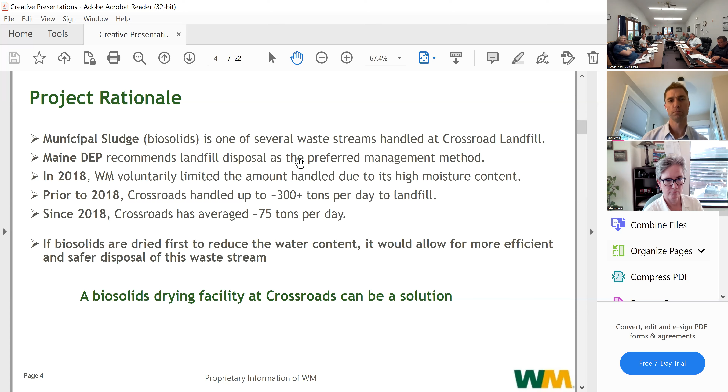Through some research and the need in the state to find some disposal solutions for sludge, we started looking at different ways we could handle some of this. And the obvious way was to dry it. If we could dry the material, we could safely handle it more efficiently in our landfill. So we conceived this idea of the project, a drying facility at Crossroads, as a solution to help local wastewater plants. Next slide here. Going backwards.

Okay, so the proposed facility is a very simple approach. All we're trying to do is dry the material for more efficient disposal in our secure landfill. Overview of what we're proposing: the facility is designed to handle 200, as they call it, wet tons, as-is tons over the scale, inbound and dry that material to reduce the water content from 75% down to less than 30%. And once you go through that process, that 200 tons would turn into 50 tons of dry material.

So it would go from that jello-like material to a dry material like you see in the picture. This would make it much easier for us to landfill the material. We propose to use state-of-the-art technology that's very energy efficient, which we're pretty excited about. We'll tell you about it in a moment. All of the storage and processing of the materials would be in an enclosed building with engineered odor control. And that 150 tons of water that comes out would be piped to a tank, and we would treat that material for PFAS if necessary before transporting it offsite to wastewater plants, those same plants that we brought the sludge from. So a pretty simple concept.

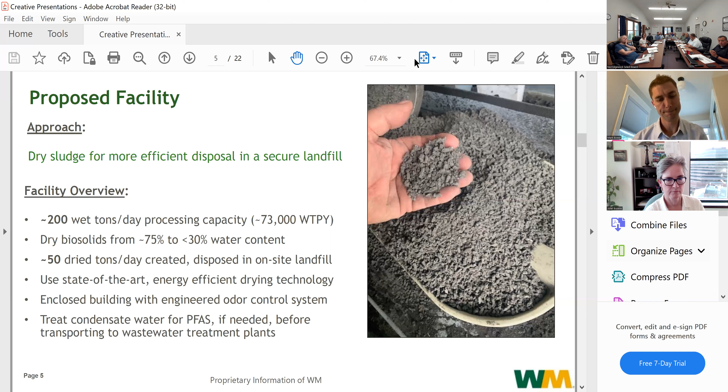We assembled a project team for this. Obviously, we're the owner and we'll be the operator. Woodard & Curran is providing our primary engineering support and helping us with permitting. Odor Science and Engineering, an expert in odor science and engineering, is providing some engineering support. Sewall Company from Portland has done a traffic impact review. Verrill, formerly Verrill Dana, is providing permitting support.

Sheridan Construction out of Fairfield would be our general contractor, and IEC Electrical out of Strong, Maine would be our electrical contractor. You'll understand in a moment why I bring them into the picture, why the electrician is on the slide. And then Shincci USA would provide the drying equipment.

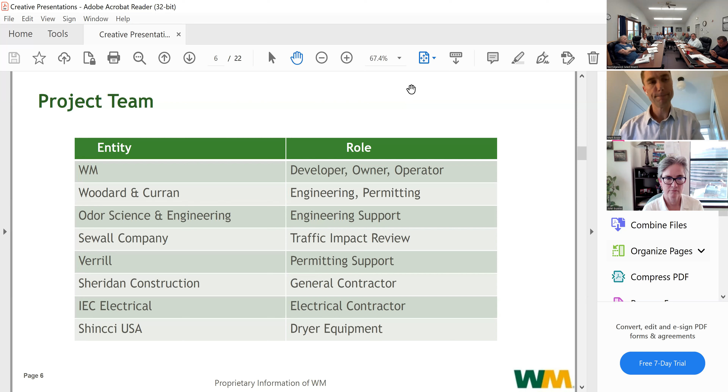The permits required: obviously, we need a site plan permit from the town here, and we recognize we need a sanitary wastewater disposal permit for that holding tank for sanitary waste from the washrooms. We also need some permits from the Maine DEP. We will need a Chapter 409 solid waste processing facility license. And we will also need air emissions licenses from chapters 140 and 115. I'll point out that odor is regulated under Chapter 409. Maine has some very strict odor regulations related to these kind of processing facilities, and that would be covered there.

The Chapter 140 and 115 will do a review to see if there's any other aspects from this proposed facility that may affect the landfill's current air emissions license. And we're also going to have a small generator just for safety reasons to have lights on and safety equipment in the event that we have an outage.

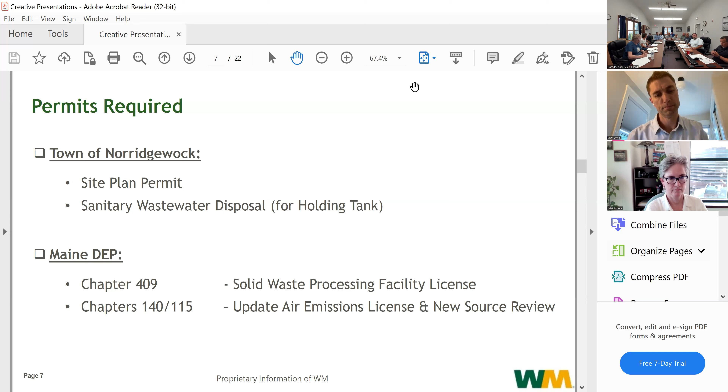So you don't have either of these permits yet? Oh, no, a great point. We wanted to first start the town permit. We plan to apply for the state permits in late August. We had a pre-application meeting with the DEP a few weeks ago, but those permit applications are not submitted yet. Okay.

So, technology overview. A little bit about sludge drying. Sludge drying has been around for many decades in the US. There are many successful operating sludge dryers since the 1980s, still operating today in the US and actually around the world. The technology has evolved, and we've kept up with the evolutions of that.

And a particular technology in this situation seemed most applicable, and that is the Shincci low temperature belt type dryer. I'll show you a little diagram of it in a moment, show you how it works. This is starting to catch on quite a bit in the US. There are hundreds of installations worldwide doing much more tonnage than we propose. But installations in the US, there's already one in Arizona, Vermont, Wisconsin, and there are more planned of this kind of

dryer. The reason why it's catching on is it's extremely energy efficient. It's an electric heat pump design that uses a third of the energy of conventional drying. It operates at a relatively low temperature. Conventional dryers may operate up to 700 degrees Fahrenheit. This operates at about 165 degrees Fahrenheit, not much hotter than your clothes dryer. And the slow speed, that temperature and the slow speed of the belt minimizes any dust or safety concerns related to the dust.

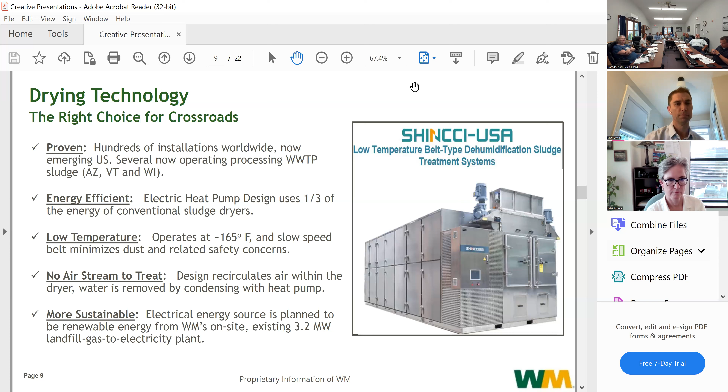How this works, I'm going to use the mouse here. First, I'll talk about how sludge moves through the equipment. There'll be 3 dryers, and we'll show you a layout of the facility in just a moment, but they're each identical. It's a fully enclosed box, if you will, like you see on the right here. Sludge is conveyed from our receiving and storage area into an opening at the top of the dryer. These dryers are approximately 10 feet wide, 100 feet long, about 8 to 9 feet high. And except for the opening coming in, it's fully enclosed.

The material gets spread out on the perforated belt and slowly moves over the course of 3 hours down one way and drops down to the bottom belt and back to the beginning, where it comes out as the dried material. Now the airflow, this is the unique aspect of this. This is also within this box.

The hot side of the heat pump, the compression side, heats up the air, and that air is blown through the belts. The belts are perforated, and that air picks up the moisture. It soaks up the moisture, and that warm, wet air, a little cooler now, goes back to the cool side of the heat pump where it condenses out. The water then comes out. Like a cold drink of ice cubes on a hot, humid day, it drops out and that collects the condensate. So it's a contained circular loop for the airstream.

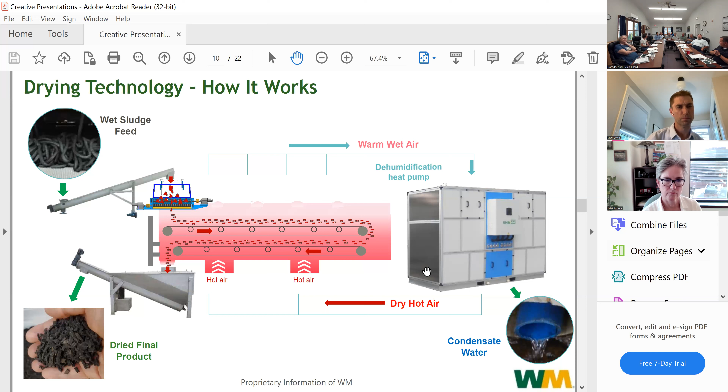So you're going to basically, any air leakage coming out of the entrance and the exit will be recycled inside the building. No, there'll be minimal air coming out of those 2 openings. I could probably best show you in a video, but it will smell in that room. I'm certain of it. It just won't be 10,000 cubic feet per minute of air blasting through there.

So now to jump onto the 30% design, which is the level that's required for permit applications like this, and that is required for the DEP applications that we hope to submit in August. For those of you that aren't oriented to the landfill, aerial shot: Route 2 down here. This is our private road up here. Goes up to the existing landfill. The landfill gas to energy plant is up there.

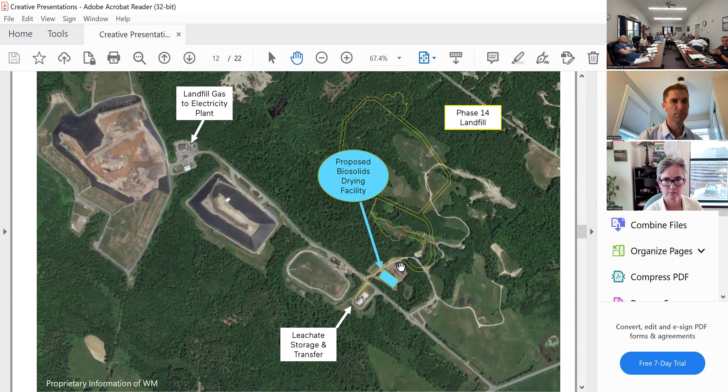Over here outlined in yellow, if you can see it, is the new phase 14 expansion, which will be online shortly. And over here is the existing leachate storage and transfer tanks. We propose putting the new biosolids facility at the site of the former tire processing facility that closed a little over a year ago. So it's deep within our site.

It's well buffered, 2,200 feet from the nearest resident. Significant buffers to all wetlands, and it's not near any wetlands of significance or other sensitive areas. And we will engineer in protections to make sure any sludge receiving activities are undercover and have containment to catch spills to be able to put that material in the building.

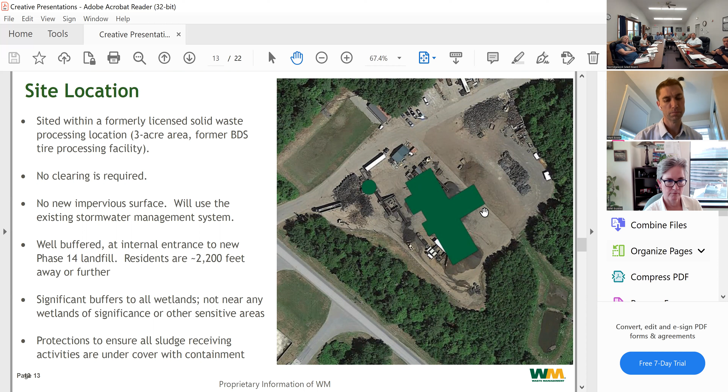This just gives you another view of this, an engineering view of it. You can see how we would build this out. Again, we're not developing any new area that wasn't already developed. The building is approximately 18,000 square feet. And I've got a better view of this in a second, but I wanted to show you trucks will come in. They will pull over here. They will back in. This area that looks a little whiter, that's actually a canopy. And they will back up to doors to empty into the building. They'll empty over a curb. The building floor for the sludge storage building will be about 8 feet below the curb. So the loads will slide off into the building.

Also point out here, this area over here is where the product comes out of the building. This is the processing building right here. I'll give you a better view of this in a moment. But this is where the product comes out. Again, that'd be a canopied building, not fully enclosed, but that dry product will be taken directly to the landfill working face. So it's just kind of taking a stop here for a little while before it goes on its way. I'll also point out here, it's engineered to get good circulation around the building for emergency access, fire trucks, etc. And the blue there is the condensate storage tank.

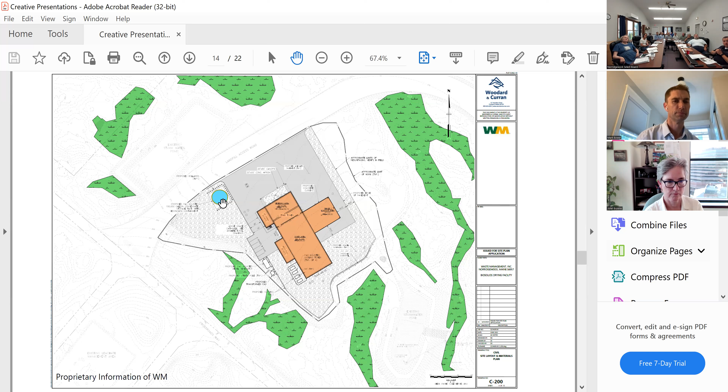Here's a general arrangement showing the building a little closer. I'll call it a floor plan. This shows you the area that trucks would back into up to these doors. Those doors would remain closed, except when we're accepting loads. They back up tires to the curb, tip into the biosolid storage building. This is one big building, but it's two separate areas. Okay, so this is the biosolid storage building. These are hoppers that'll feed the dryers. There's a hopper for each dryer, so it's 3 independent trains.

But this building, our analysis shows, our testing shows, this is where the majority of the odor potential could be from, in that sludge storage building. So that is going to be kept separate from the other building and will be ventilated at the rate of 4 air changes per hour to an odor control system. And we'll talk more about that in a moment.

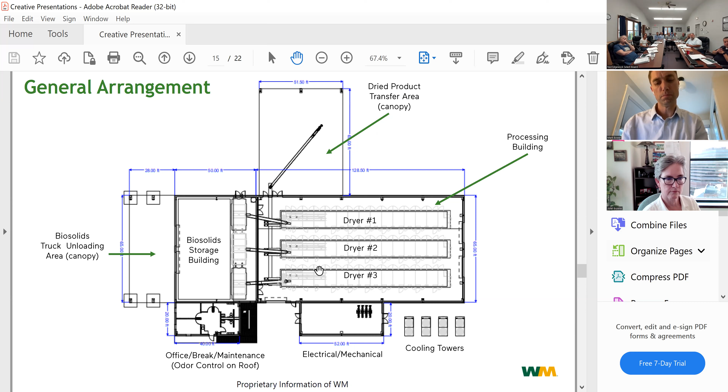Here's the dried product transfer area right over here. We have an electrical mechanical room over in this area, and then there's an office break maintenance area with an odor control system on the roof of that building to service both this area and this area. So to talk a little bit about odor and traffic and noise and some of the protections we put in place.

Odor control, two primary potential sources, biosolids transport in the trucks. And we're expecting 8 to 10 trucks per day, which is far less than we used to take prior to 2018 of the same material. And the trucks are going to be required to follow our transporter rules and requirements and existing license requirements. So these kind of trucks have to have sealed tailgates, have to be covered. They need to follow not just the DOT rules, but also our rules.

For the processing facility, our first line of defense, of course, is it's a well buffered and protected location, but we're certainly not relying on that at all. We're going to follow a contain and treat strategy for the storage and processing buildings. They'll be fully enclosed under negative pressure. So we're always pulling air into the building to go to the active odor control system.

And in designing the odor control system, we determined it was best to get accurate source data from actual sludge storage areas and from a similar drying facility for the processing room, as you were talking about before. And the odor levels are much higher in the sludge storage area than the processing room, was confirmed there. But we wanted that data to do our odor modeling. Woodard & Curran has specialists on their staff that did detailed modeling. It takes into account atmospheric conditions, topography, the roofs, where we put stacks, all kinds of things.

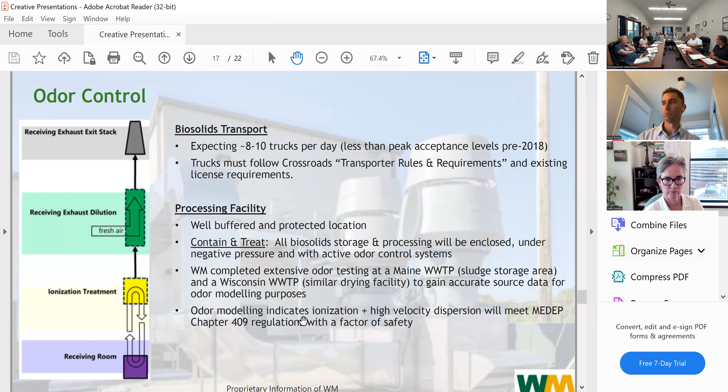Okay. We looked at many different kinds of odor control systems, and in the end, the modeling indicated that technology called ionization plus high velocity dispersion, which is basically high velocity dilution of post ionization, easily meets Maine's Chapter 409 regulations, which are very strict not to have basically odor at a property line. Hope that begins to answer your question. We can probably talk more about that if you'd like. Yeah, I get more questions on that. Okay. Yeah, I think Woodard & Curran can provide some answers there as well.

Traffic. So the proposed facility, again, it's going to be 8 to 10 trucks per day. It'll generate 4 to 6 tanker trucks of condensate going off-site back to wastewater plants for disposal. And there's an estimated 10 trips related to employees and vendor deliveries. So that full traffic impact study was completed last month by Sewall Company. It included all landfill related traffic, not just our proposed new facility, but everything that comes in and out of our road.

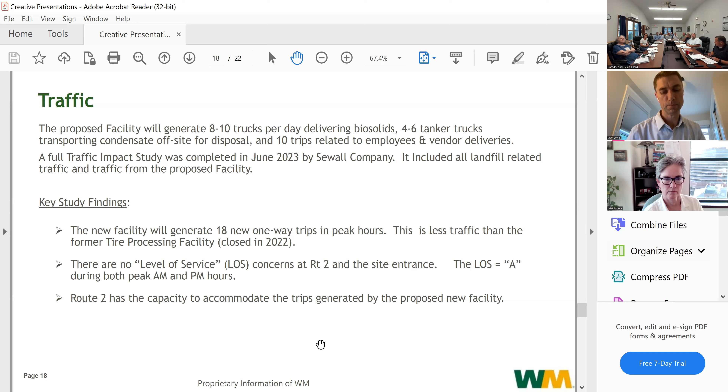And the major findings out of that, it takes up quite a bit of the application that's in front of you, but the major findings were that the facility will generate about 18 new one-way trips during peak hours. But this is less traffic than the former tire processing facility generated. That had significantly more. It also found that there are no level of service concerns at Route 2 and the site entrance. It meets DOT's highest standard, level of service A, during both the peak morning and afternoon hours. And then finally, it found that Route 2 has the capacity to accommodate the trips generated by the proposed new facility. So pretty solid study.

With respect to noise, again, facility location works in our favor, on purpose, to have it more towards the center of the site. There'll be noise from trucks and loading equipment, but it'll be similar to the noise generated by the existing operations of the landfill, and it's limited to normal working hours. Processing equipment in the building, conveyances and drying equipment are fully enclosed in an insulated building. And this equipment does not make a lot of noise.

The largest potential noise source in our analysis was the odor control equipment outside the building, the fans that run 24/7. The analysis on that, using the data provided by the supplier of the equipment, was the noise would be expected to be about 38 decibels at 360 feet from the facility. And why do we put 360 feet? Because, again, these are requirements we have to do for DEP, all this modeling. That's the nearest property line, but that's a property line that's landlocked. So far lower levels, lower than 30 decibels, at the next nearest occupied property lines.

For comparison, 40 decibels is considered the sound of a quiet library. This particular kind of setup that we're using is common not only in wastewater treatment plant settings, but it's also used in urban areas, at labs at universities, academic settings and other situations like that. And one of the reasons is it's pretty quiet. So again, it's expected to be significantly less than the former tire processing facility that was not enclosed.

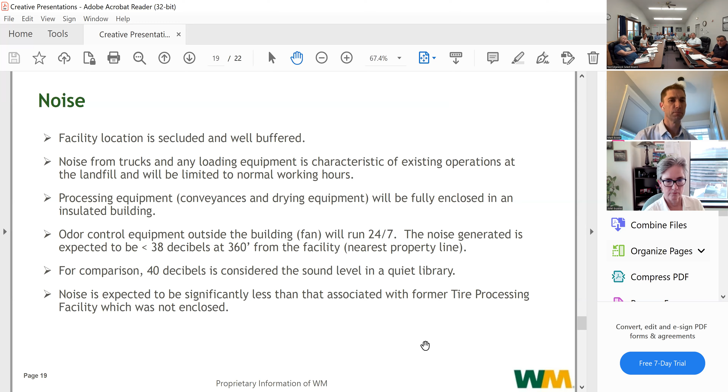And at that, I probably ran just over my 20 minutes, but I got a couple questions.

My biggest concern is the dust particles, because you're going to get dust particles. That's just a given. And these possibly could be PFAS type stuff, where you're using an exhaust fan to create your negative draft inside the building. The last thing I want to see is the land around it getting covered in PFAS.

Yeah, so remember I said that the area that's going to be very aggressively ventilated is the wet sludge holding area. So that's wet sludge. In the area of the dryer, one of the reasons for picking this dryer is the relatively low air movement out of the dryer. It's slow, 3 hours in that dryer, at a low temperature, and the air doesn't go through it aggressively. So I think the opportunity to have lots of dust flying all over the place in these enclosed buildings, or outside those buildings, is going to be pretty minimal.

Your exhaust fans and things like that, are you going to be filtering the air through that? Good question. I don't know if we've considered putting filters on of some kind. I know when I worked in an IBM plant, they filtered the exhaust and the intake air to like 3 microns, which is pretty small, smoke. Yeah.